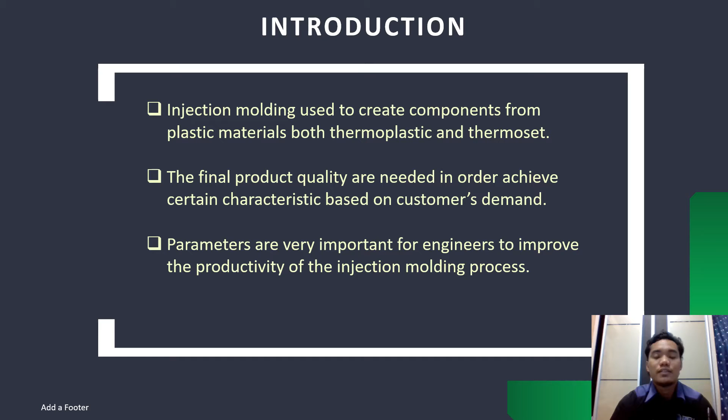So these are the objectives of this thesis. First, to investigate the most significant injection molding process parameter based on the tensile strength of virgin polypropylene. Next, to optimize the combination of injection molding process parameters for virgin PP. And lastly, to determine the process factor ranking of PP.

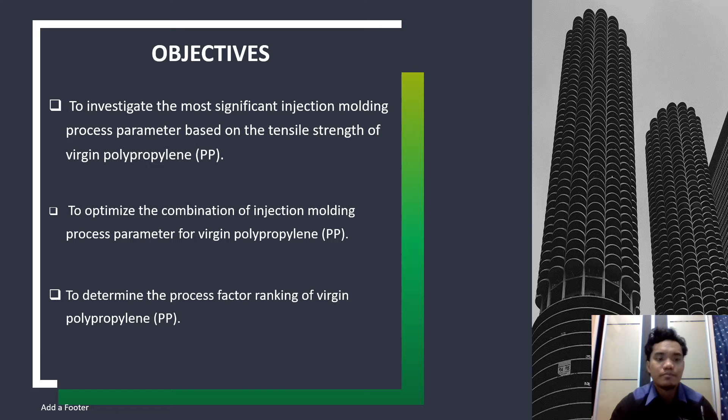For the problem statement, I found that manufacturers need to reduce costs in order to sustain in the market. Next, tensile strength of a material will always be a customer concern in order to get a high quality product.

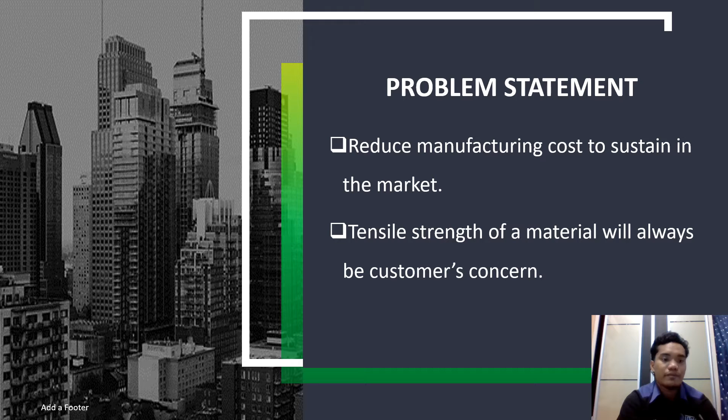The scope of this research consists of the material, virgin polypropylene, the process of the injection molding machine, and the injection molding process parameters, which are cooling time, packing time, injection speed, packing pressure, and mold temperature. Next, Taguchi optimization is very crucial in order to design the experiment. And last, the study of the ultimate mechanical property, which is tensile strength.

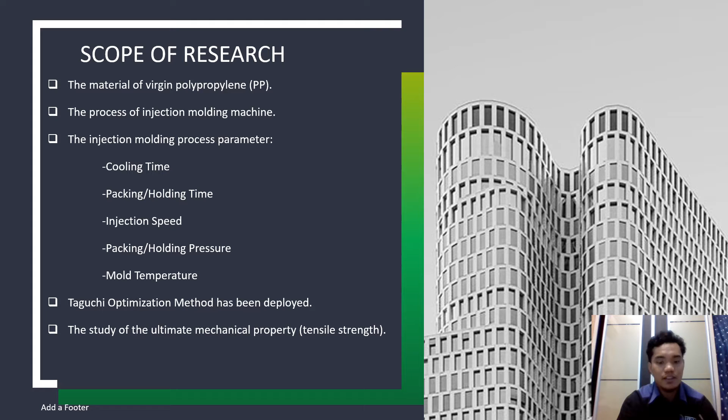This thesis is very important to improve the process parameters of injection molding, to give a guideline in the plastic industry, and to gain new knowledge about plastic to be used in manufacturing plastic.

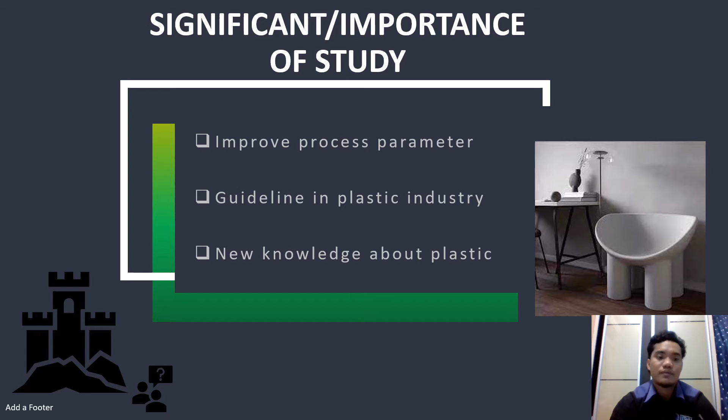The literature review will cover topics about the injection molding machine. The injection molding machine was invented in 1872. At that time, it was used to shape buttons, packs, and similar objects by Isaiah and John Hyatt. In World War II, plastic manufacturing started to get popular in various types of industry.

So basically, the injection molding process consists of four processes: clamping, injection, cooling, and ejection. The machine works via plastic granules fed through a hopper into the barrel and heated into a molten state. Then the molten plastic will be pushed by a motorized screw to the cavity through gates and hot runners. Then the product is cooled in the cavity before being ejected.

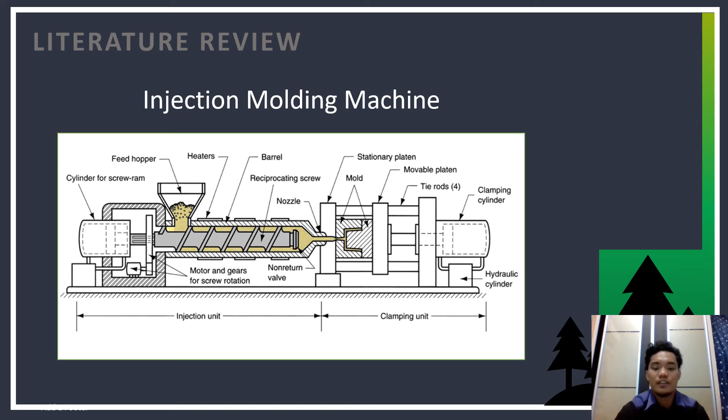One of the important topics in the literature review is the material itself, which is polypropylene. So, what is polypropylene? Polypropylene is a polymer of propylene via chain growth polymerization. It has also been classified as one of the commodity plastics. Commodity plastics are usually used for mass manufacturing. And although polypropylene is a semi-crystalline material, it is easy to manufacture.

The next slides will describe the process planning of this thesis, how the material will be prepared, how to design the experiment, and how to get all the information. For material preparation, basically we need to prepare the material itself, which is virgin polypropylene in the range of 25 kg to 50 kg.

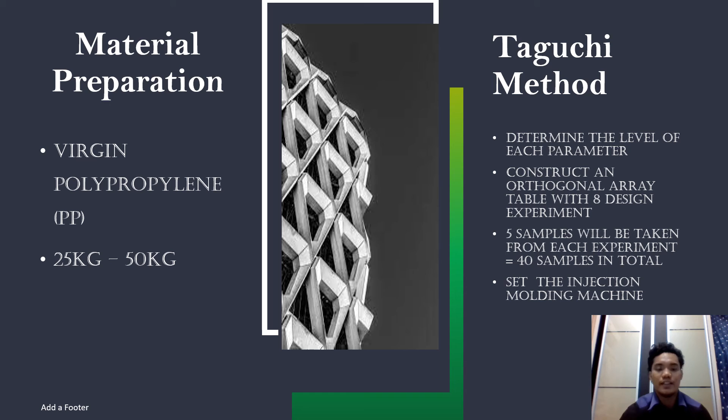After all the data has been set, we set the injection molding machine. For the tensile test, we run this test to determine the tensile strength of the material. So 40 tensile strengths will be determined using the ASTM D638 standard specimen.

After the data from the tensile test has been determined, we start to analyze the data. The data will be analyzed using Minitab. In Minitab, we choose the Taguchi optimization method with the L8 design experiment. After all the data has been put in Minitab, it will generate information like variance of mean, which will be the information for our objectives.

After all the information is gathered, we are able to determine which process parameter is the most significant. Next, the rank of each process parameter is also identified. And last but not least, the optimum combination of process parameters of injection molding for PP will be determined.